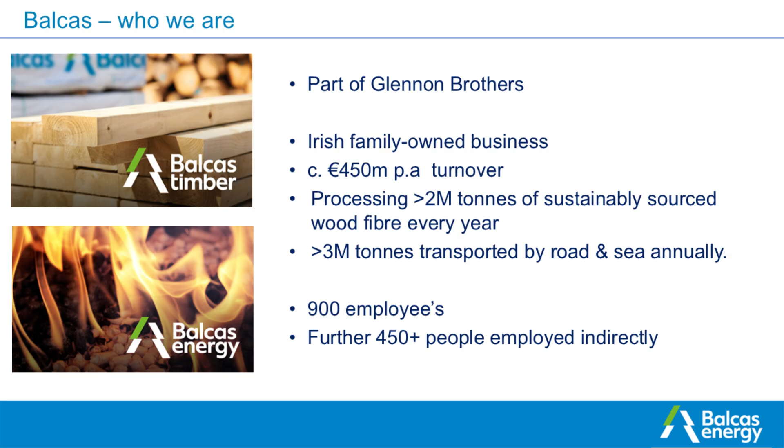We operate 3 CHPs and 1 wood chip boiler, which are all fueled with forest and sawmill residues, and we're generating 106 gigawatt hours of electricity and 319 gigawatt hours of heat annually for use in our production processes. Glennon Brothers is an Irish family-owned business, with around 450 million euros per annum turnover, and we've 900 plus employees, about half of which are on the island of Ireland, and a further 450 plus employed indirectly in the forest industry.

So I want to ask you a question. Anyone who is using process heat, do you have a load that looks similar to this? Have you looked at biomass in the past and been told that it wasn't possible for whatever reason? Or possibly your load profile didn't suit? Or have you been told that your site doesn't have space to run a biomass system?

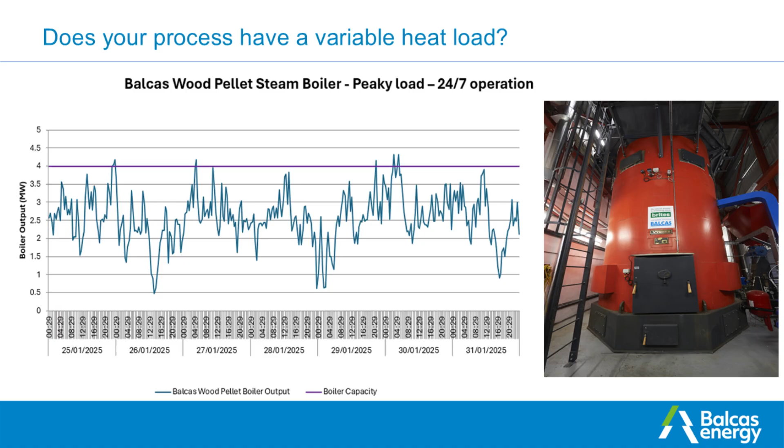This is the steam load of one of the Scottish distilleries we've been supplying steam for over 10 years, using our locally manufactured wood pellets. We supply them around 20 million kilowatt hours of heat every year. Kilowatt hours of steam to run their distilleries. And traditional wood pellet and wood chip biomass boilers are a very effective decarbonisation for industrial scale heat users. And now there is another option as well.

And that is wood pellet powder burner systems. These are a tried and tested technology from a company called Vyncke, who are owned by Vinci. There's many proven installations throughout Europe. They cope like fossil fuel with variable loads from 3 to 50 megawatts, and they're dual fuel for startup and backup. Existing boiler conversions are possible, and they make wood pellets a very viable option for large industrial scale steam, hot water and thermal oil users, as well as drying applications such as cement, aggregates and bitumen.

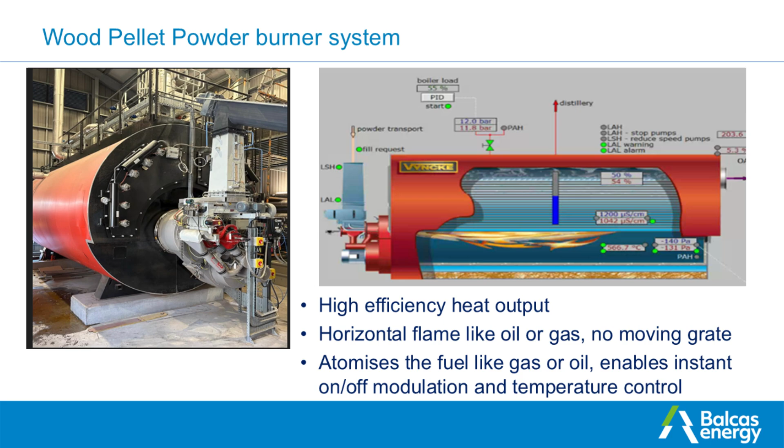And this slide here shows a 5 megawatt steam system currently running in Scotland. It's the one Noel mentioned earlier on. It's on the Isle of Jura. It's just been commissioned last month. It has high efficiency heat output. The flame is horizontal like oil or gas, and there's no moving grate, which makes a huge difference for maintenance and cost of maintenance. It atomises the fuel like gas or oil and enables instant on-off modulation and temperature control.

It has a small footprint, more like a fossil fuel system. There's no moving parts inside the boiler, so again, reduced maintenance costs. The other features and benefits would be a much smaller infrastructure requirement for both the system and the fuel storage, and it can be fitted into existing infrastructure depending on the site.

They're scalable from 3 to 50 megawatts, and they're dual fueled; they could be dual fueled with biogas or bio-oil. Some sites are going to have AD systems and things like that, but probably not enough to run their whole system, but you could dual fuel it with a powder burner system. They cover peaky loads like a fossil fuel system. There's a 4-to-1 turn down on them. Significantly reduced maintenance costs, 92% efficiency.

And these systems work by milling the wood pellets back down into wood powder. And you use pellets rather than sawdust because of the amount of energy that you can store in a very small amount of space. Wood powder is like sawdust with very small consistent particle size. It increases the surface area, making it much more reactive for combustion compared to whole pellets.

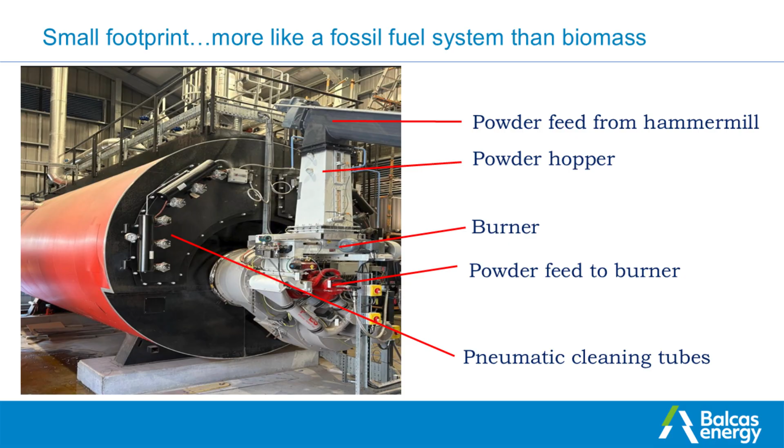The powder is delivered using a pneumatic feed system, and this ensures a consistent and controllable fuel flow, especially for large-scale or continuous operations. Inside the burner, the wood powder is atomized, essentially sprayed into the combustion chamber. It behaves like a fine mist or gas mixing with air in a highly efficient air-fuel ratio.

The powder ignites almost instantly due to its fine texture. And because the particles are so small, they burn very cleanly and completely, reaching high temperatures with low emissions. The result is a stable flame and steady heat output, suitable for replacing fossil fuels in industrial boilers and thermal processes.

The burner integrates with existing boiler or process heating systems, transferring the heat into water, steam, or thermal oil, depending on the site's needs. It's ideal for food factories, distilleries, drying facilities, as I said.

And why it's different from pellet stoves or boilers is, unlike standard pellet boilers, which rely on bulky or solid fuel combustion, this system atomizes the fuel. It's like gas or oil. It enables instant on-off modulation and temperature control, and burns at higher efficiency with faster response times. It can be installed in larger scale or more demanding industrial applications up to 50 megawatts.

There you see the different applications, including the powder feed, the powder hopper, the burner feed, the powder feed to the burner, and then pneumatic cleaning tubes, which intermittently blow compressed air through the heating tubes to make sure the soot doesn't build up.

The flue gas treatment is an ESP, so these are sized depending on the size of the burner to guarantee compliance with MCPD. You see that at the bottom there you have the ash bin, and this site here is a 6 megawatt system. It's at a food factory in Sweden, and that ash bin only has to be emptied about once every 6 weeks. Balcas Energy wood pellets are coming in with an ash content of about 0.3%.

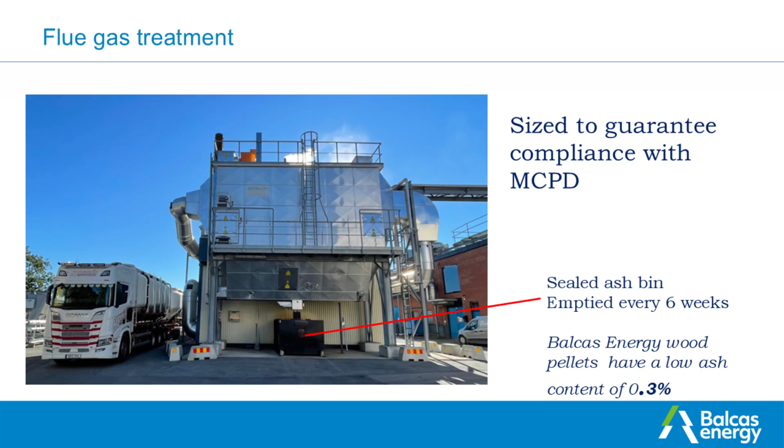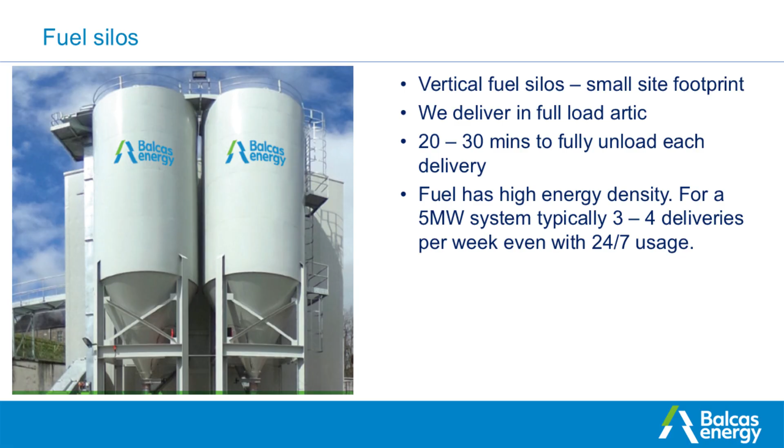The fuel silos then, they're vertical fuel silos with a very small site footprint. We can deliver in full load artic. It takes about 20-30 minutes to fully unload each delivery. Our fuel has a very high energy density, so for a 5 megawatt system, typically 3 to 4 deliveries per week, even with 24/7 usage.

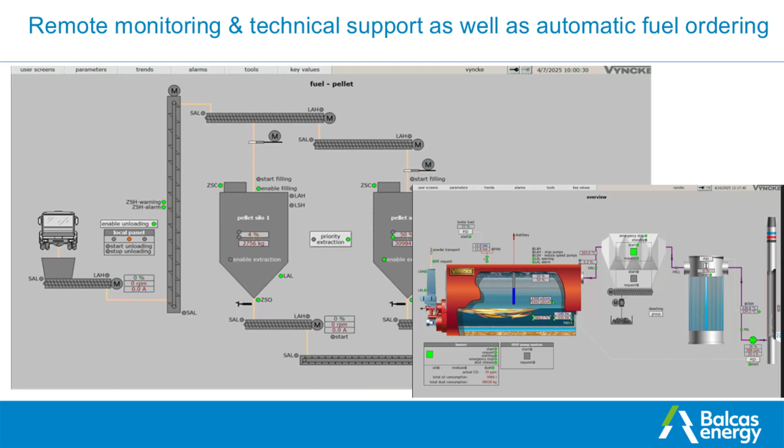Remote monitoring and technical support is available, as well as automatic fuel ordering. You see there the screens, the very same as you'd see with a fossil fuel system, including the fuel silos, so that enables us to ensure that you always have fuel on site.

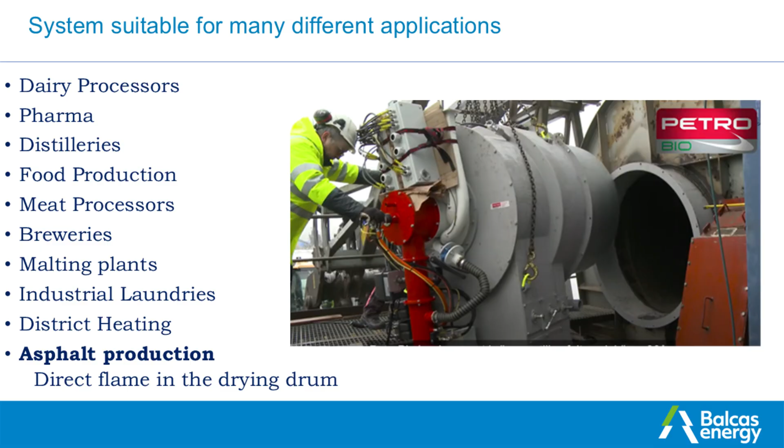So again, these systems are suitable for many different applications, like dairy processors, pharma industry, distilleries, food production, meat processors, breweries, malting plants, industrial laundries, district heating. They're so flexible that it can even be used for asphalt production, which is a different process because it uses direct flame.

And that picture there is of a powder burner being retrofitted onto an aggregate drying drum, again at a site in Sweden. And there's a number of sites in Sweden where they're making asphalt with powder burners.

So I suppose any system is only as sustainable as the fuel it's burning, and that's where our wood pellets come in. So our pellets are manufactured to consistent, rigorous standards. We manufacture to ENplus A1 standard, which gives us a quality fuel that cannot be matched by other forms of forest biomass. For example, moisture content for the standard has to be less than 10%.

Our long-term score is coming in at 7.5%. Calorific value has to be better than 4.6 kilowatt hours a kilo, and Balcas Energy long-term score is 4.8. And ash content has to be less than 0.7%, and ours is coming in at 0.3%.

So our pellets are manufactured from sawmill residues as a co-product of our sawmill in Enniskillen, and the primary products are construction, agricultural and pallet timber, which lock in the CO2. And again, we do not chop down trees to make fuel.

Our pellets are manufactured using green electricity and green heat from our on-site CHP plants, which are fueled with sawmill and forest residues. This is a carbon neutral fuel. It's not subject to carbon tax. It's cost competitive with fossil fuels, and it's very much a product of the circular bioeconomy. Nothing is wasted.

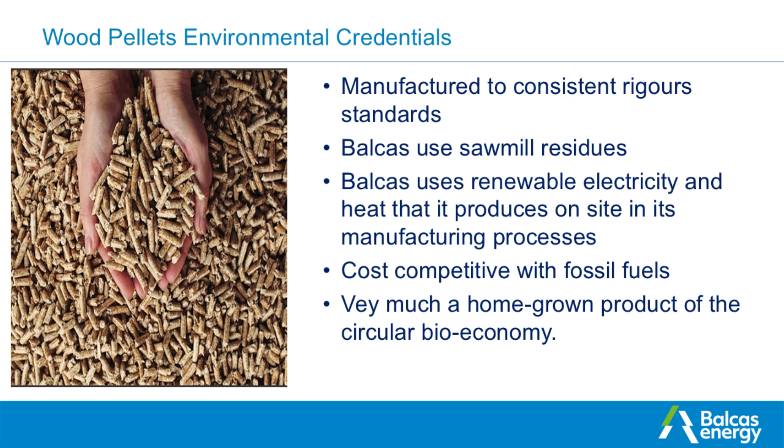I spoke earlier on about certification requirements. The Renewable Energy RED II and RED III directives are there in place to ensure that biomass fuel is from sustainable sources and land is not being diverted from other agri-uses to make fuel.

So different greenhouse gas emissions reduction scores are applied depending on the fuel being produced, where the raw material is coming from, and the source of the energy that is used to produce it. For wood pellets made from wood industry residues, as ours are, there are 3 cases that are used.

So case 1 refers to processes in which a natural gas boiler is used to provide the process heat to the pellet mill, and electricity is from the grid, and those pellets receive a 75% reduction in greenhouse gas. Case 2 refers to processes in which a wood chip boiler is used to provide process heat to the pellet mill and electricity is from the grid, and that gets an 87% score.

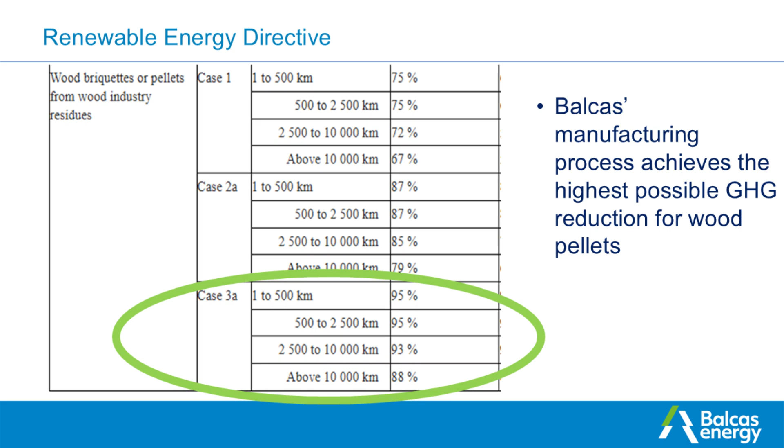And case 3 refers to processes in which a CHP fed with wood chips is used to provide electricity and heat to the pellet mill, and that's what we do, that's our process, and we receive a greenhouse gas reduction score of 95%.

Our certifications then. For the purposes of that, we spoke about SURE earlier on, but the certification that we have is SBP, which certifies that our pellets are compliant with the Renewable Energy Directive and the Revised Renewable Energy Directive. EN Plus sets the standard for pellet quality and sustainability and is the recommended global standard for wood pellets. And we're the only entity on the island of Ireland to hold pellet producer and pellet distributor EN Plus certification.

FSC is the Forest Stewardship Council, which certifies that the harvested timber processed in our sawmill is from sustainable sources. WFQA is the one Noel manages over here. And then we are also registered with the EPA as a solid fuel producer.

As regards availability and security of supply, for long-term contracts, we can guarantee security of supply. What we offer is scale. We have multiple production sites within our business, 8 in total, all producing wood products and all generating sawmill residues. Only 2 are making pellets, so that means we have 6 that are not. So there's a huge opportunity there for increased production if demand is there. And that doesn't take into account potential timber processing expansion in the future.

We have a well-established, robust supply chain with our own forestry team, and 30% of our raw material comes from private landowners. So we have a broad supply base. We have more than 6,000 customers, and we make 25,000 plus deliveries annually. Our back office team manages this supply across 2 islands from Enniskillen. We supply everything from small domestics to industrial process steam users and everything in between.

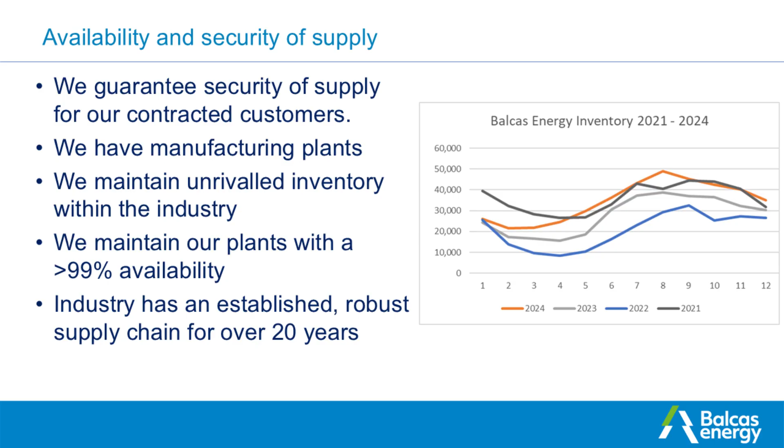We operate a system of planned maintenance and predictive maintenance on key systems and components, which make sure our plant is always running. We maintain critical spares of key and long-lead-time components of more than £3 million at our sites. And we have an experienced operating and maintenance team that have allowed us to operate this type of plant successfully for more than 20 years.

Every year we spend more than £3 million on maintenance of our plants. We also have regular CapEx projects where we look to increase efficiency and reliability of the plants. And that's very important. As part of Lennon Brothers, since they've come in, they have a record of every year investing in our plants and improving efficiency.

The total wood pellets we produce annually is 180,000 tonnes, which are all locally produced and made from locally grown forest harvesting residues. That's local to each plant. These clean residues are used to produce the wood pellets, while the rest is used to power the biomass CHP plants. Wood pellet production facilities operate 24/7. There's a 2-week shutdown each year required for planned and statutory maintenance. Staggered maintenance periods are there so that only one plant is out of operation at any time.

We also offer a turnkey integrated solution. So in addition to our own team, Balcas Energy works closely with partners to provide turnkey solutions, including fuel supply, burner system installation, fuel storage, maintenance and technical support, ensuring a seamless transition from fossil fuels. If preferred, we can supply heat or steam on a cost per kilowatt hour basis, therefore only paying for energy consumed and not paying for inventory on site.